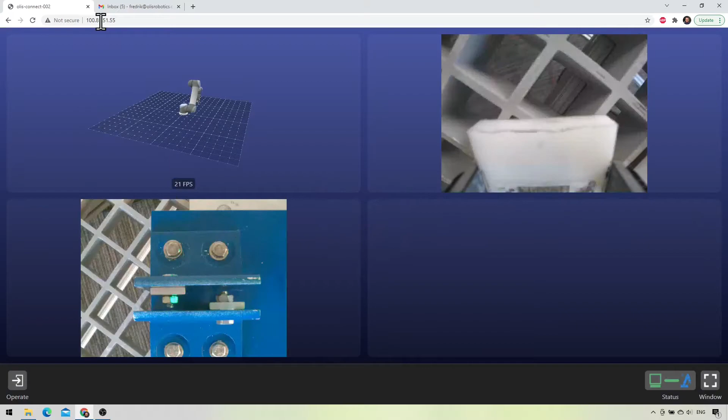It looks something like Zoom on steroids, but it has some familiar points like the 3D render panel with the robot and a set of video views.

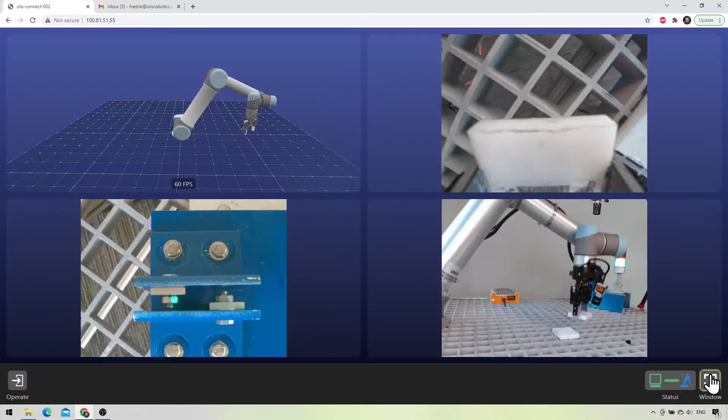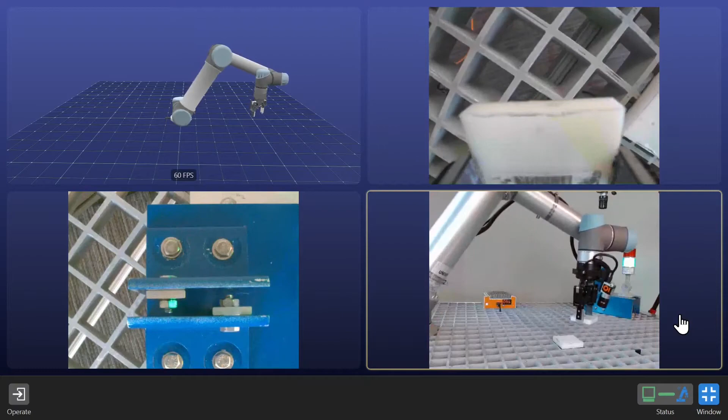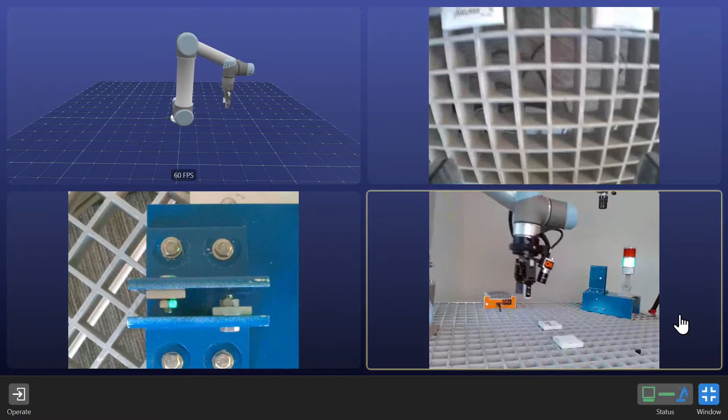This is just a website, and that's important because if you're a small company, you don't need a custom device to access your robot from. You can just pull up your tablet at home and log into the VPN and access it through there. Or if you're a big company and already have a fleet management system, you can use that system to access Olis Connect, because all you need to open this view is an IP address and a URL.

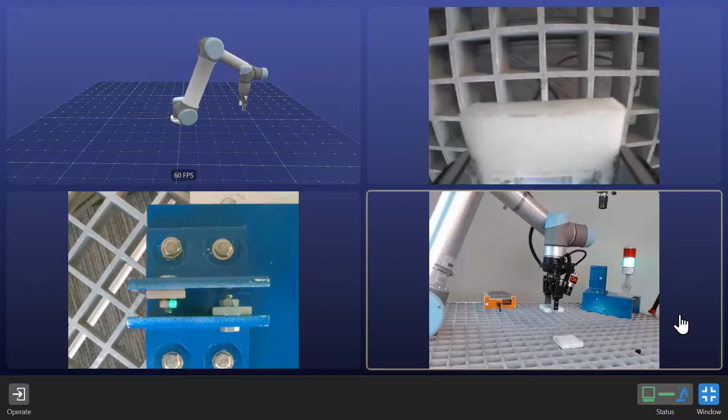We have a set of video cameras here, and what we can do is click on one of them to maximize it. In this view, we put one of the cameras next to the robot, so we can see where we put the two others.

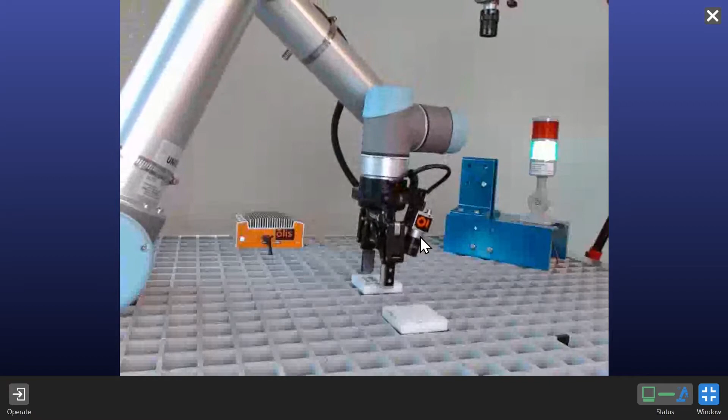We have one camera at the end of the robot, where you see the Olis logo, and our kit comes with a wrist mount to help you mount this. We also send the kit with a third camera up top here, looking down on this blue device, our mock CNC machine, because later I'm going to demonstrate how we can use Olis Connect in machine tending.

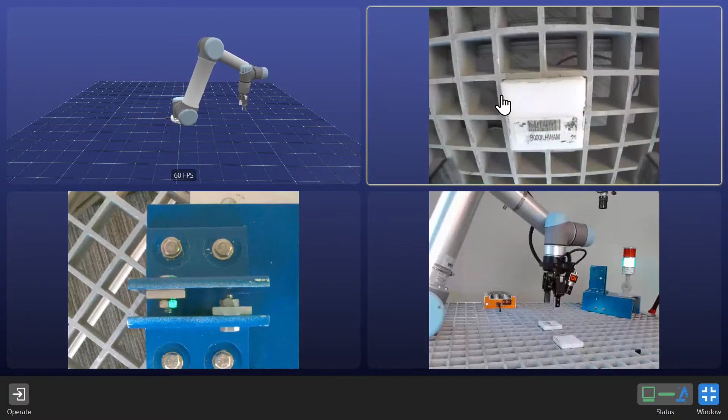So with that, I'm going to exit out of this to get back to what we call the conference view. With this view, we can see what's going on with the robot. We can check in, make sure it has material, make sure everything is running, nothing has crashed, no other issues. But really, it gets interesting once we start taking control.

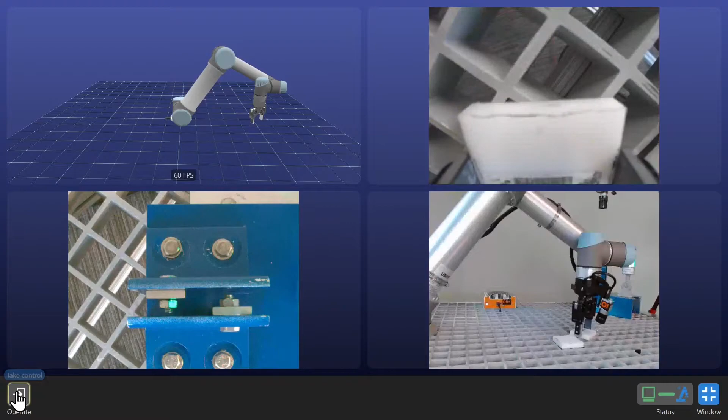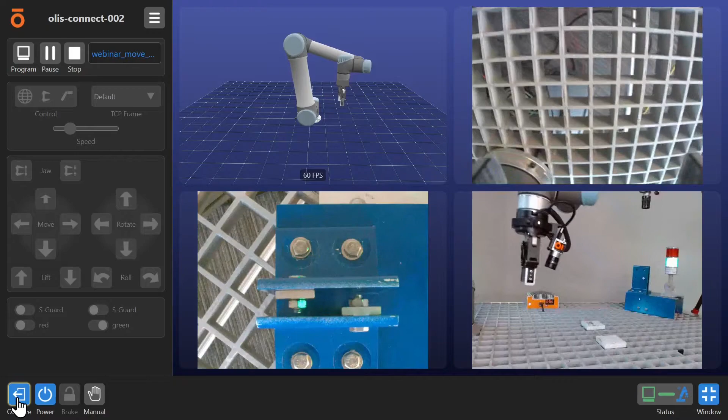To do that, we push operate on the lower left-hand side, and you see how this left-hand panel suddenly appears. This is the operator panel. This software is not meant to be a programming tool for your robot, but rather we've chosen to give the operator the tools they need to start and stop programs, take over teleoperation, and get the robot back online if there's a problem. So that's what you have right here.

So what we're going to do is start by stopping the program we're currently running. I stop it there with the block at the start position, and then we're actually going to go straight into teleoperation. I do that by going down and pushing the manual button at the bottom.

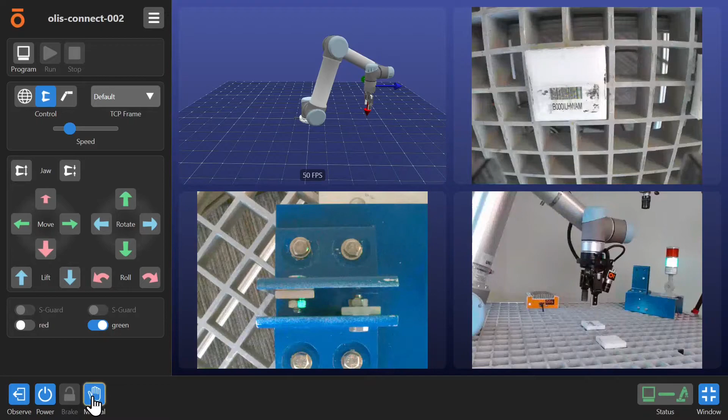You can see how a couple of the buttons just lit up. Those are the buttons we're going to use to teleoperate the robot. I'm going to zoom in here using my mouse with the scroll wheel, so you can see a little bit better.

When I push one of these buttons on the left, the robot will move accordingly. So if I push back on the red button, it'll move along the red axis there, and likewise with the green, it'll move side to side along the green axis. If you're familiar with Universal Robot and Polyscope programming in their environment, you might recognize this as the default tool center point, or the default TCP frame.

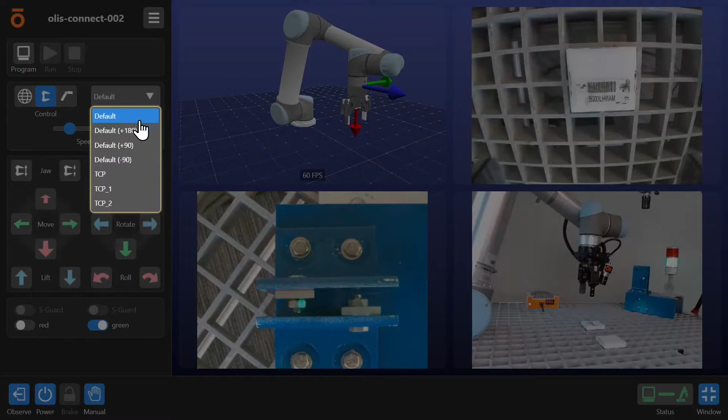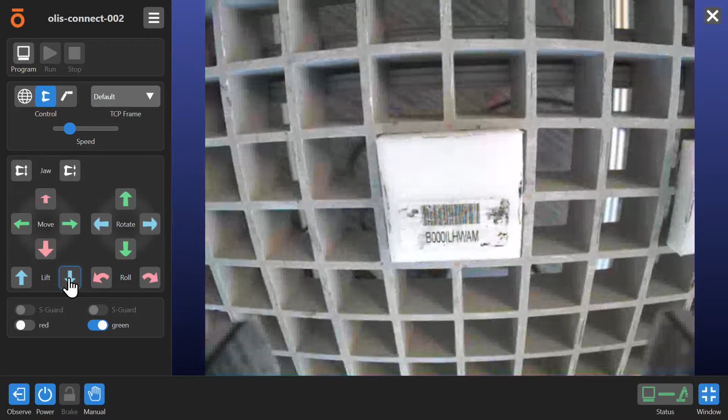In Olis Connect, you can actually pick any one of your TCP frames as your coordinate frame for teleoperation. In this case, we're just going to use the default, mainly because it's aligned with the wrist camera we have. So when we push left and right, it's all according to this video camera, and that makes it very easy to teleoperate and drive.

We can also rotate the end effector. If I start pushing the green button, you can see how the arm, or the end effector, rotates about the green axis. And I can go left, rotate about the blue one.

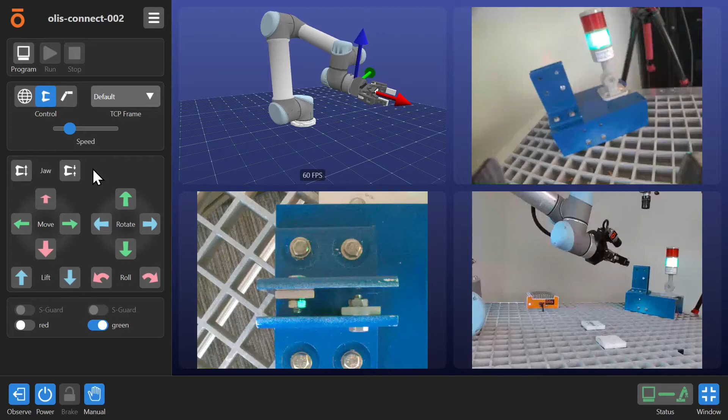Really, at some point I kind of stopped looking at these axes and started looking at this view instead, because what we have now is the ability to drive this robot in first-person view.

So I'm going to drive up to our little mock CNC machine, where we have a vise here on the left. This is where we'll be putting our workpiece. We have a light indicator here on the right, so when it goes red, it means we're pretending there's some work being done with this workpiece. We can also rotate down to look and make sure our workpiece is in the right location.

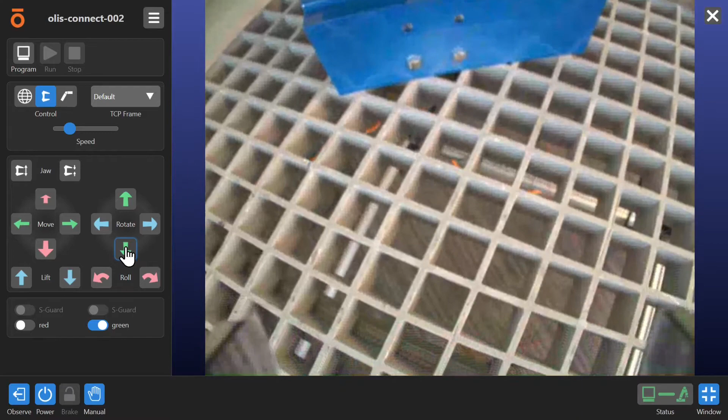And that looks fine. It's located at the starting position.

Before we hit play on our CNC demo program, let's look at the digital IOs at the bottom. Not only can you drive the robot in Olis Connect, but you can also change the outputs of the digital IOs. When I push red, it turns on, and I can turn off the green one. In this case it's just a light indicator, but you can have all sorts of equipment hooked up to your robot, like a vacuum or some fluid system. If it's wired up to your digital IOs, you can control it from wherever you are through a browser window.

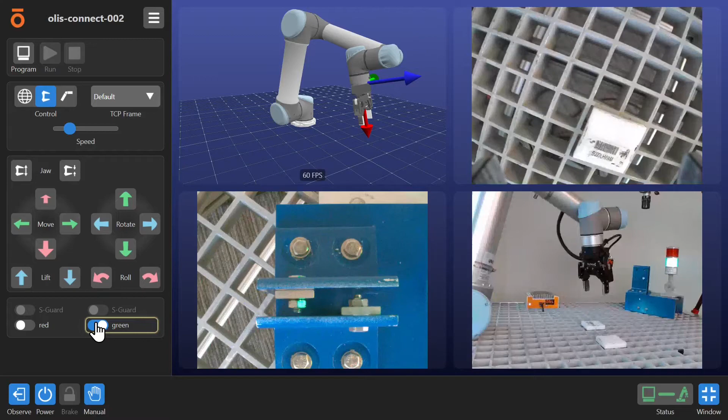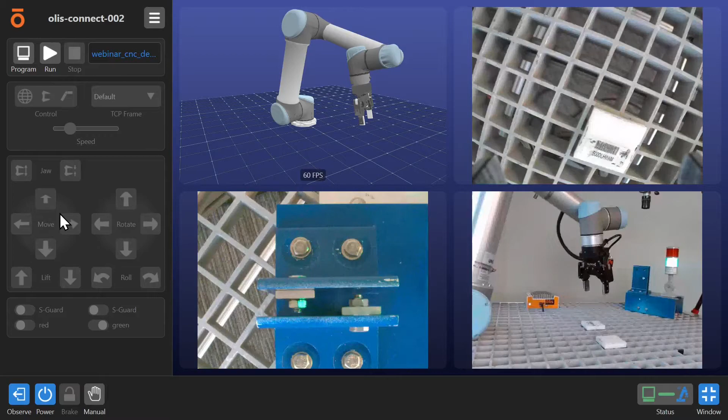Now we'll go to the top and load a different program. I can either start typing the name of the program, which is useful if I have a lot of them, or use the folder structure to find it. In this case, we're going to load the webinar CNC demo. Once that's loaded, we check the cameras, everything looks clear, and we'll go ahead and press play.

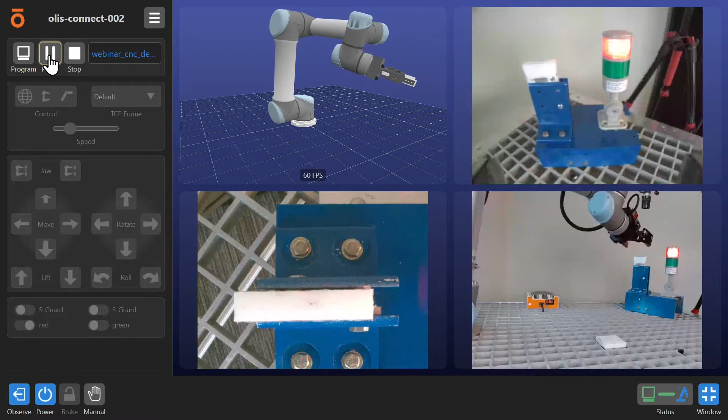It's first centering the block before picking it up. It goes up to the mock CNC machine and puts it down into the device, then lets go and backs off slowly while the work proceeds. That takes a couple of seconds, but we sped it up to make it a little more exciting.

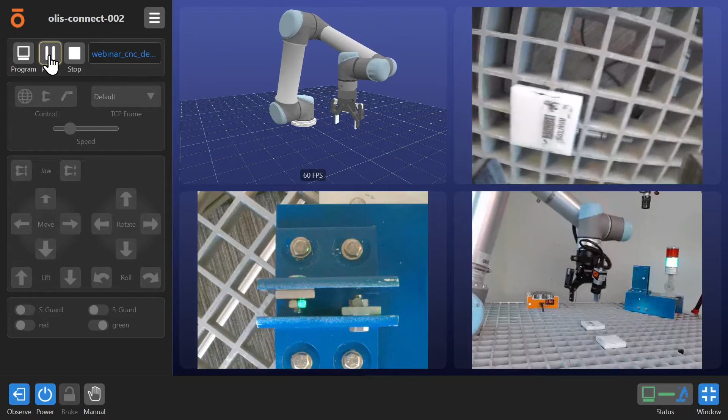Then we go back and pick the block back up. It moves in and brings the block back to the home position where we initially picked it up. This is very representative of a machine tending application and the type of work the robot would be doing all night long.

Now I want to show you something here. The robot goes in again and puts the block down. I'm going to stop it right there, because you might notice the robot hasn't perfectly centered the block inside the device. Right now it still seems to be working, but we might want to address this before a problem happens.

So we're going to do what we call polishing of the feature points. That means I'm going into manual control to drive this robot and center it in the device. I'll push right, go down a little bit—I overshot there, so I'll lower the speed to make sure I get it nicely aligned.

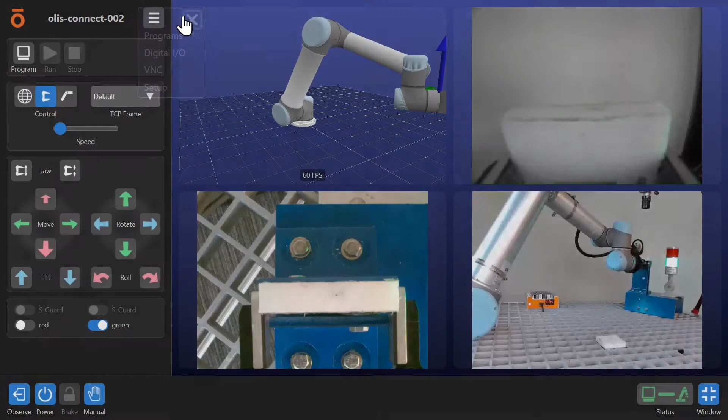Perfect. Now that we've updated the position of where we want the robot to be, we need to go into the robot computer itself and save it. This gets a little advanced: you push the three lines to get into the menu and hit VNC. This is still inside your browser, but we have access to the full Polyscope environment here as well.

So we're going to go to the Installation tab, down to our features, and pick Device feature, and we're going to teach this point, because it was currently offset to the left. We want to update it to reflect the current position. We don't need to push any of these buttons, since we already teleoperated the robot to the point we wanted. So we just press OK, and that will be saved.

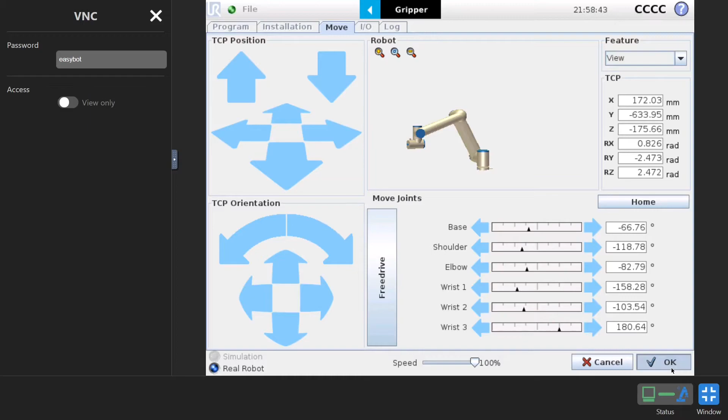Now we can exit out of the VNC view.

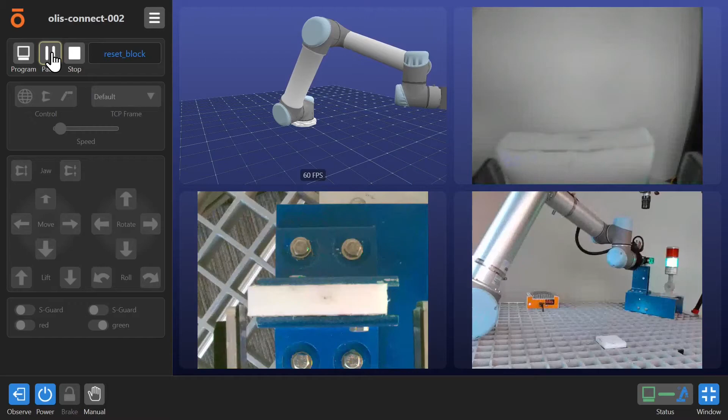To restart this program, I have two options: I can teleoperate the robot to bring the block back down to the starting position, but in the interest of time, I'll just use my reset block program instead. I hit play, and it does a little realignment procedure, picks up the block, and puts it down. Now we can go back and start our webinar CNC demo again.

Hit play, and hopefully this time the block will be more centered into the device.

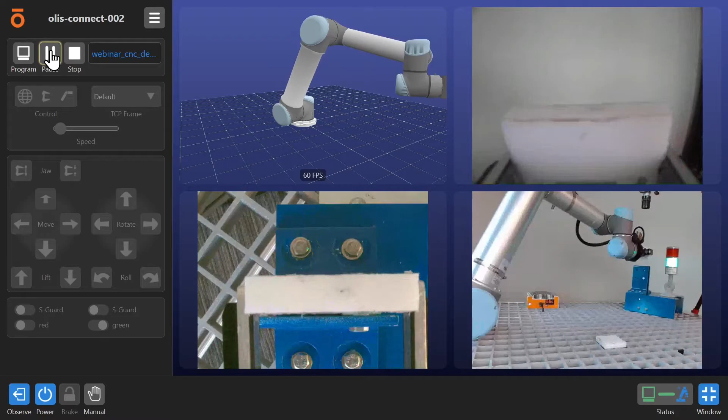That looks pretty good to me. I guess it's still a little bit to the left, but it's better at least.

So what we have done here is we've taken a program that was running but wasn't perfect, and we've polished it up so it can hopefully run for a long time uninterrupted. Now we're going to look at what happens when a program actually does fail. Since we just fixed this program and it could probably run for a very long time without a failure, I asked our engineer Ryan to go make sure we get one.

And I've just received a notification here on my computer. So let's switch over to screen share. Here's what my email currently looks like.

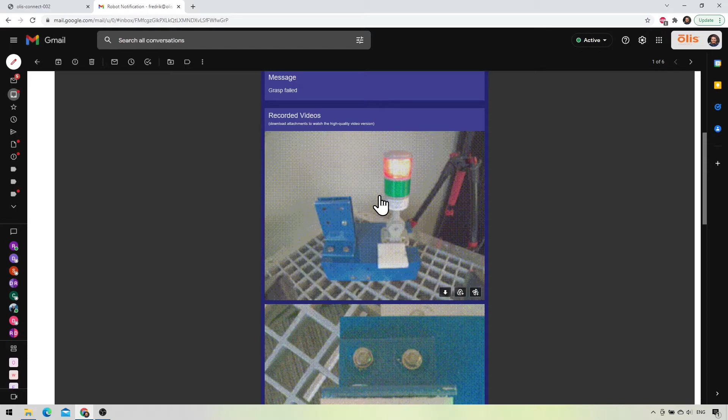I got this Olis Connect 002 report where at the top I'm getting some basic status information. The main thing you should focus on is the fact that it says grasp failed - that was the issue. Under that we have a set of animated GIFs giving you a clue as to what actually happened, but the high quality version is going to be in your email attachments.

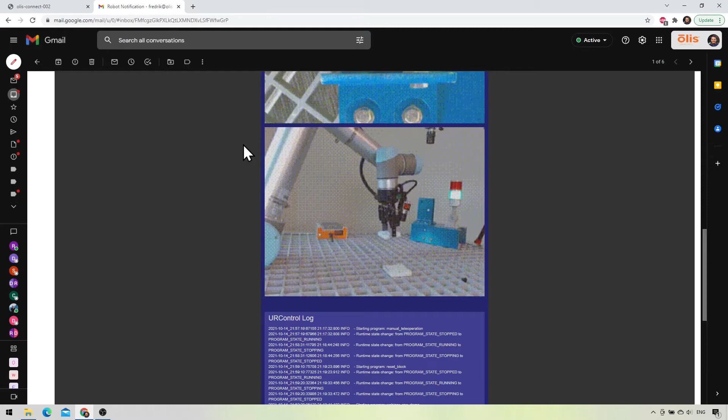So you don't have to worry, the videos are not going to be at this quality. Beneath that we have the URControl logs, where we can see if something more serious happened with the robot. What we're going to do is click on the third attachment because I think that's the overview camera - so here we can get a view now of what happened.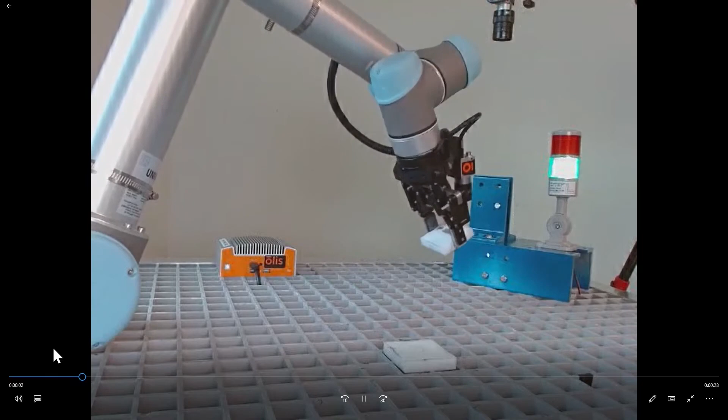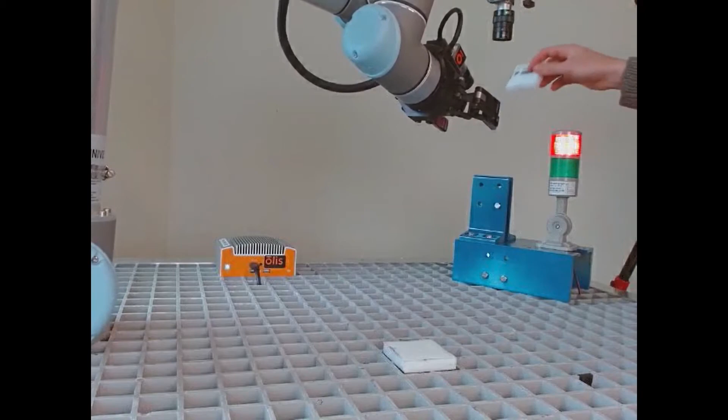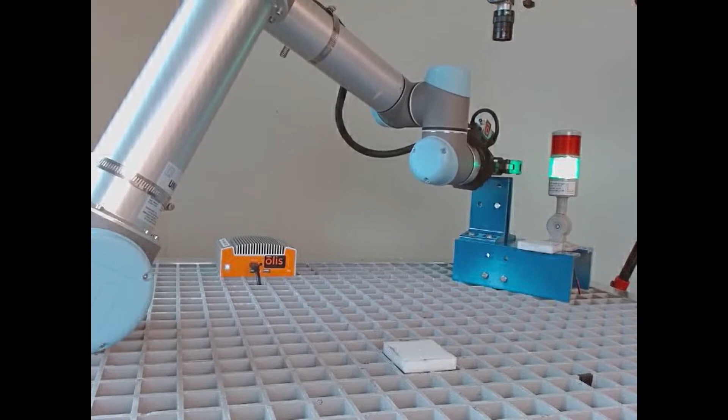So it went up, picked the block, put it back into the device, and now - because I didn't want you guys to have to wait for a long time - I had our engineer Ryan come sabotage this program a little bit, because I think it was very well programmed, probably could have run for hours. But now we have a very good idea of what went wrong.

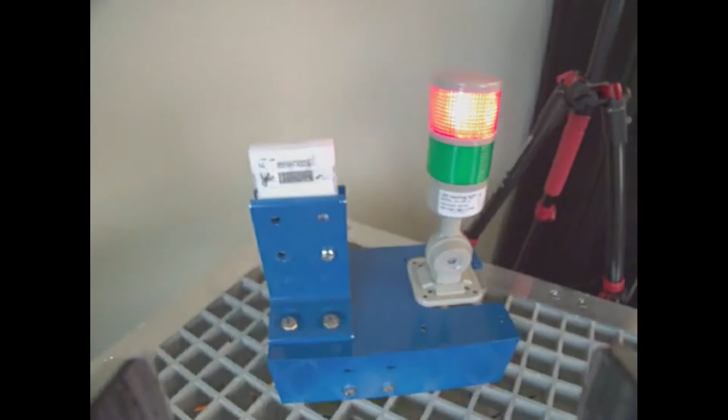So we're going to open up the other perspective as well, the wrist camera. We can see we put it in the device, backed off. A lot of times when you come back to a robot cell and it stopped, you might not have any idea of what went wrong.

This can be a big issue if you have problems that occur very rarely. Let's say you have an issue with the robot every 4 months and no one was there to see it when it happened. In that case, Olis Connect would have caught it and we would have been able to be a lot more surgical in our remediation of the problem.

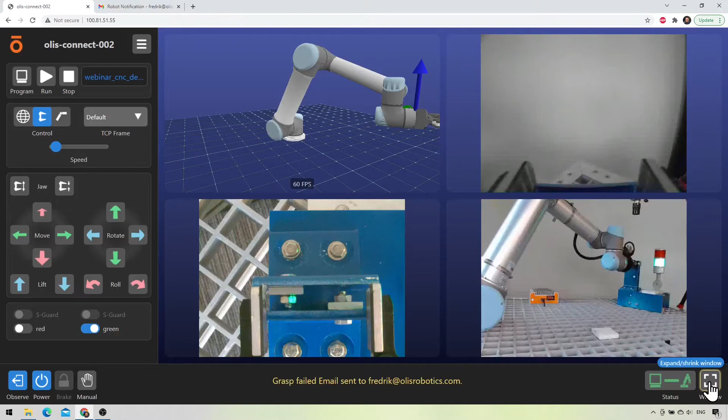So now we know what went wrong - we know that it was Ryan who took the block. We go back to here in Olis Connect. I'm going to maximize this window to full screen, and we're going to get the program back to work.

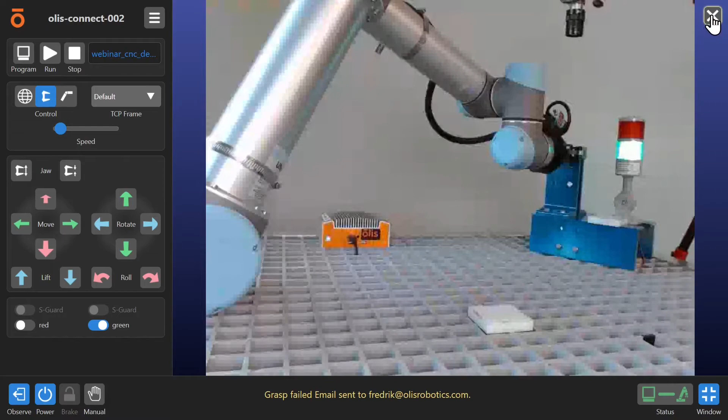So in this case, I'm going to say that this piece down here is lost, and we're just going to go pick a new one. So what I'll do is stop it and go back to manual teleoperation.

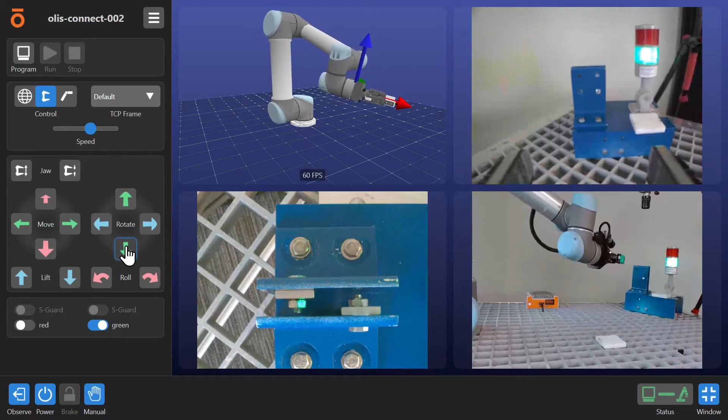And I'm going to drive over and pick up that block over there. So I'm going to move back, turn up the speed quite a bit to make it a little faster. Rotate down, and turn the speed down a little bit.

There, I'm going to open our gripper and start driving towards the block. I'm not sure exactly how lined up I am - we'll see.

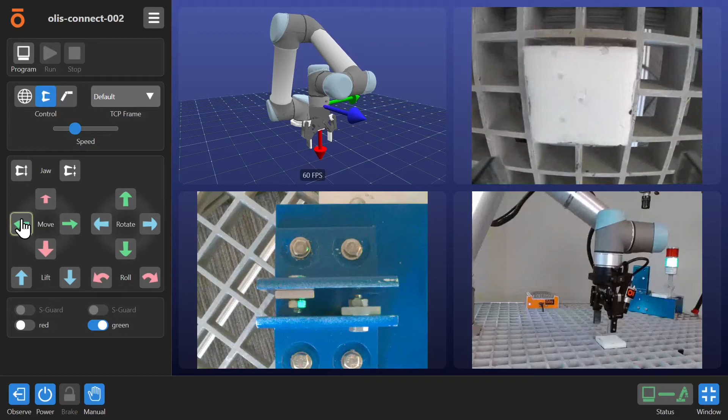If you don't want to be clicking on these on-screen jog buttons, or using your touchscreen, you can actually plug in a gamepad to your device, and this website is advanced enough that it will detect that and let you use a gamepad instead. Looks pretty well aligned.

It looks like that block is sat down a little uneven, so I'll pick it up there, a little higher.

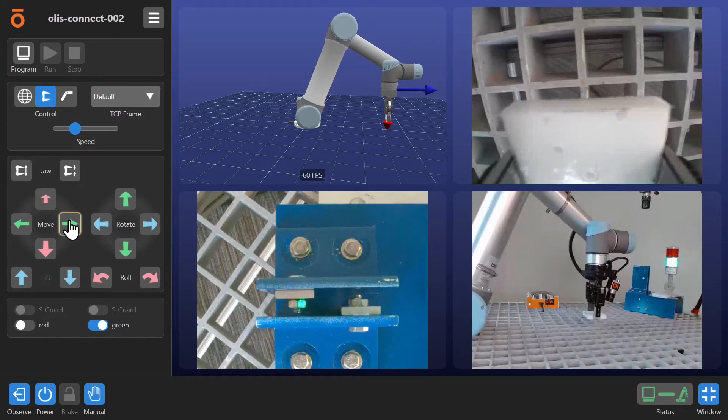It's pretty good. We're going to move it over to the start position. For this demo, I cheated a little bit - I made a little dot there in the grating so I can see where it is. That looks pretty good. I'm releasing my jaw.

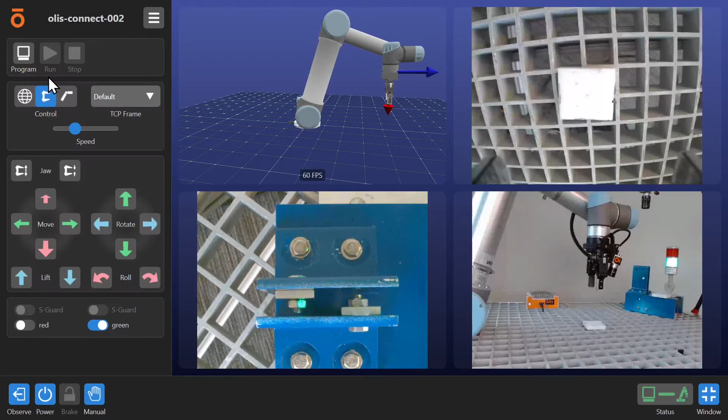Back off. So now we can just get this program back to work. Let's see there. Play. And we are back to running our CNC demo.

So now you might say, well, my programs don't have this capability right now. This is not how my programs behave. When they stop, I just get a pop-up on my robot computer, and that's it. So what I'm going to show you now is how we can modify your robot program, and this takes just a couple of minutes to have it behave instead where it sends you email and lets you take over and fix problems.

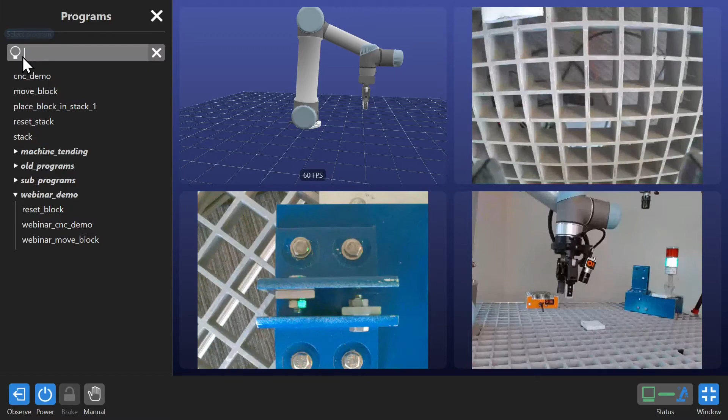So I'm actually going to stop this program, get back to screen share, and stop this program. We're going to go back to our original simple block moving program that we had running, and I'll start that. Just to demonstrate what it normally looks like when a UR program fails, I'm going to have Ryan come and take the block again.

So now he takes the block, it goes in and stops. And this time, we didn't have an alert here at the bottom. There's no email being sent. And I'll show you why.

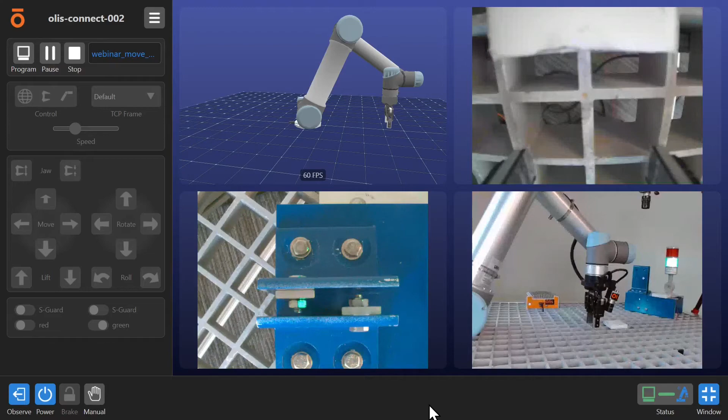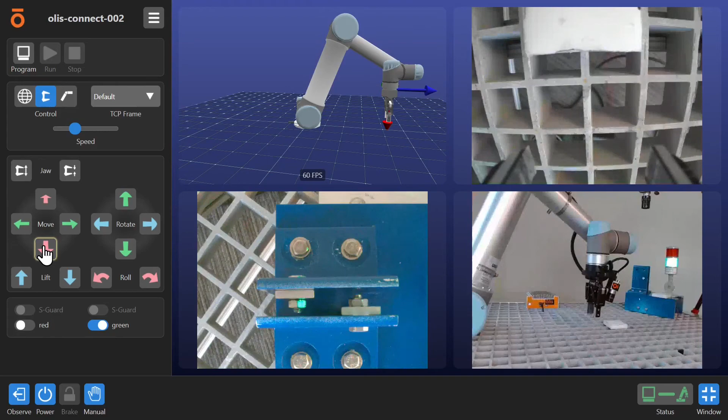So now we're going to go back and hit play on this program. Actually, I need to reset - I need to go pick up that block. So I'm going to go pick up that block. Actually, Ryan, could you reset the block into the starting position since I moved off a little bit?

Okay, so I'm just going to press play, and Ryan's going to show what it looks like this time when he puts the block out of the way. So we'll wait one cycle, and then his hands will come back in again.

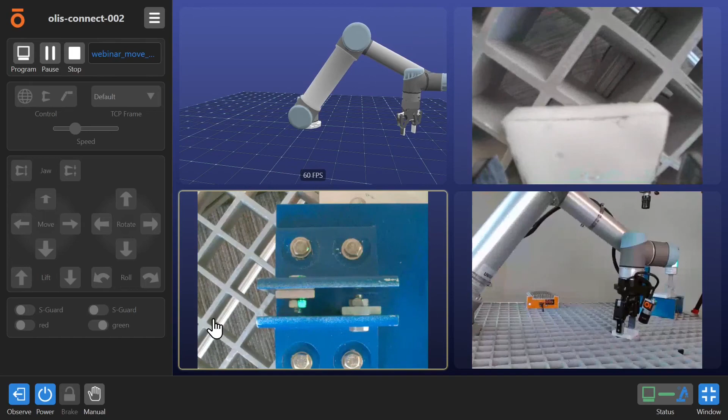So this time, the program had the desired behavior. We got a message at the bottom - could not grab block, please help - and an email was sent to frederick@olisrobotics.com, which is also the email you should use if you want to get in touch with me and discuss some of your robot applications and how Olis Connect can help you.